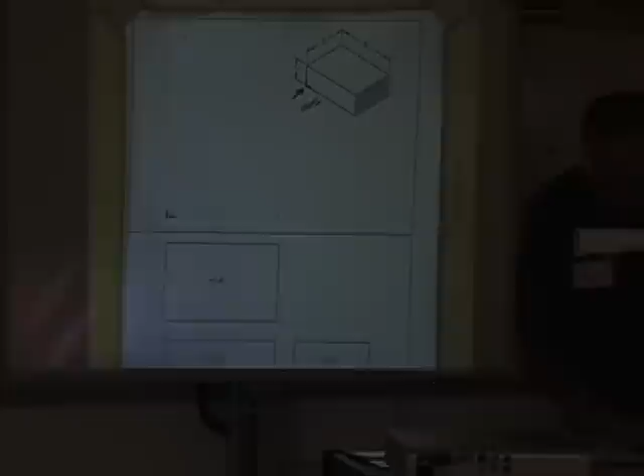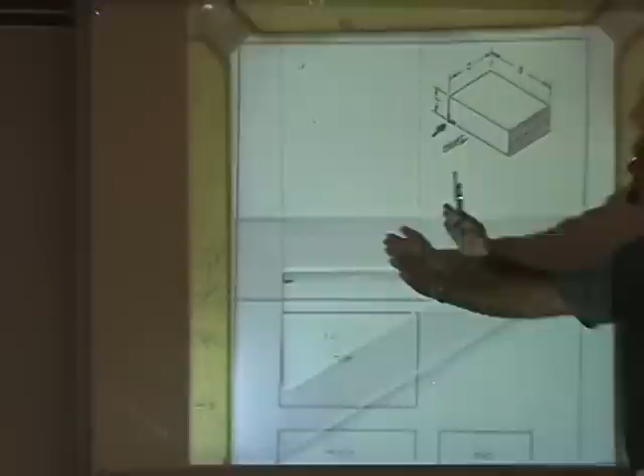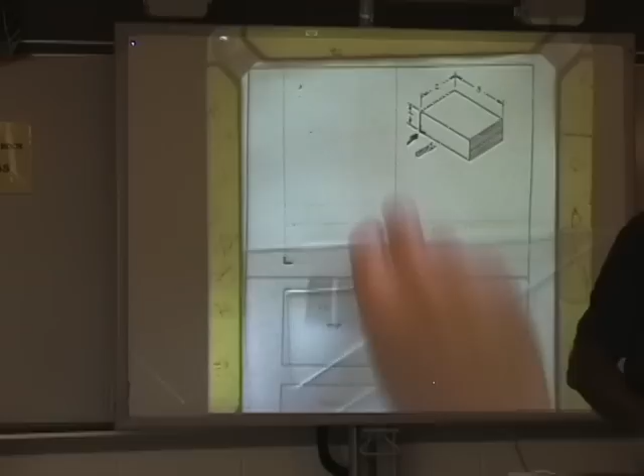So I'm going to take my space for my top view. And then I'm going to give the pen to Ollie. And I'm going to say, if this is the front view, here comes the top. Okay, what I'd like you to do as best you can is draw the top view. We agree? Most part? These are for kids who just can't keep that sketching thing out of, they can kind of keep that addiction to sketching good. And so I'm looking at the top view. We agree it should look like that.

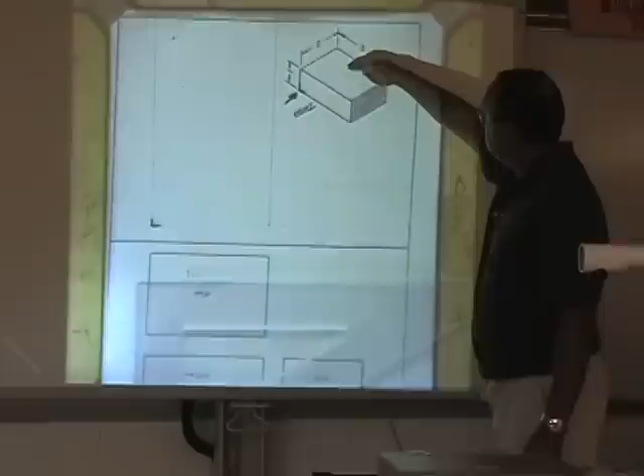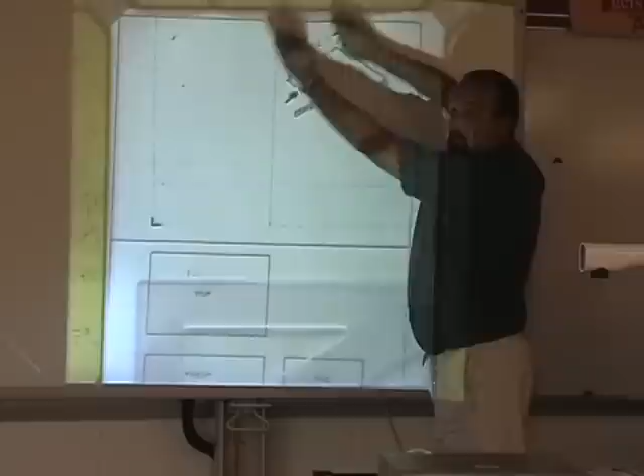Now I have to look at my drawing and see if I'm looking at the top view. Where is that corner right there? That corner for the front view is right here, right? Nothing in here. So where is that corner in the top view? And you may go A, B, C, or D. And if I flip the block up, it would be right there. Because that corner is shared with this corner. So I already have this line in place. I have these two lines in place, right? So all I need to know is where is that line right there? How far is it from here to here? 2 inches.

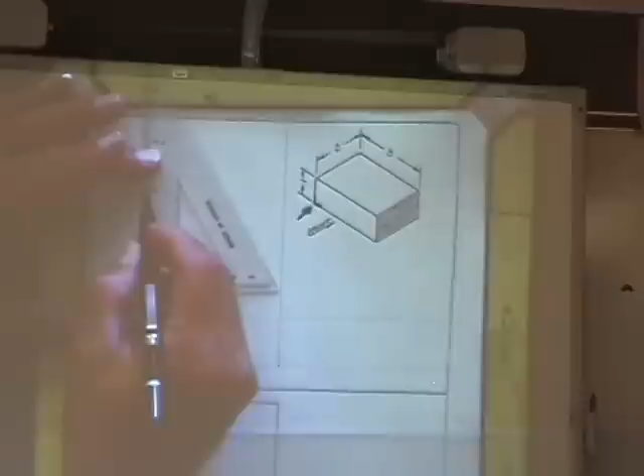So I take my ruler. You're up 2 inches using the construction line. And now I should have a top view. Looking over at the right side, distance between views, I already placed it. What's the distance between views? ½ an inch. Right?

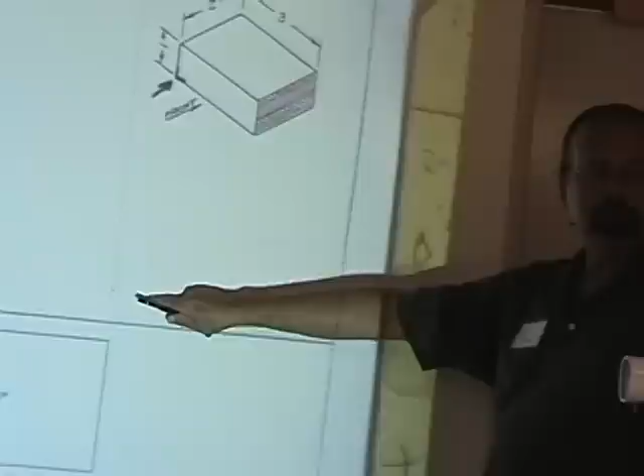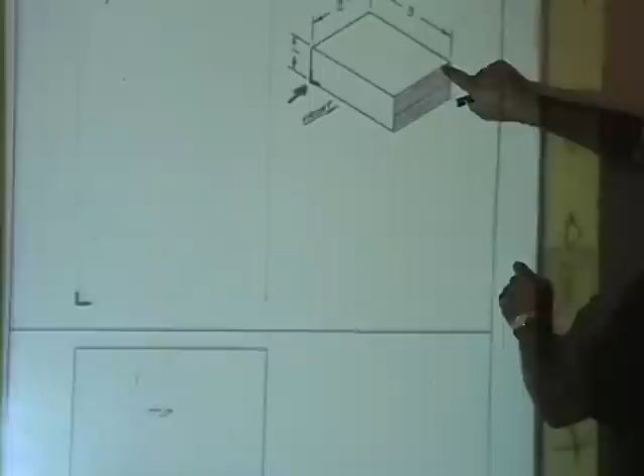And now where is this corner? Make sure that you're looking up here so that you can answer the question. This corner right here on the right side. My lower left hand, lower left hand. This right here goes up. This line's here, coming back. This line's here. I'm missing this line. How far is it from here to here? 2 inches. This is isometric, this is orthographic. So the thing I'm missing now is my visible lines, or object lines.

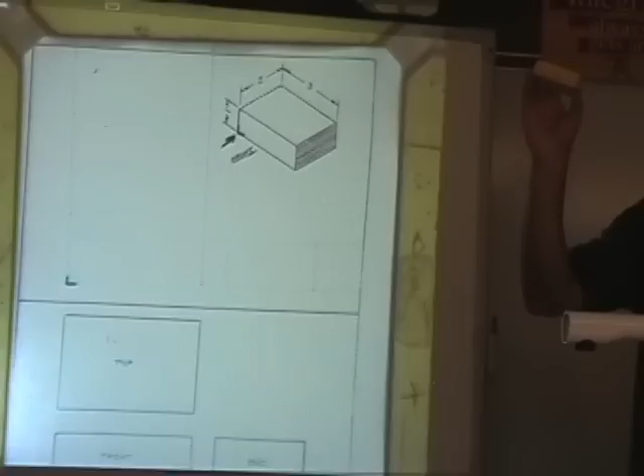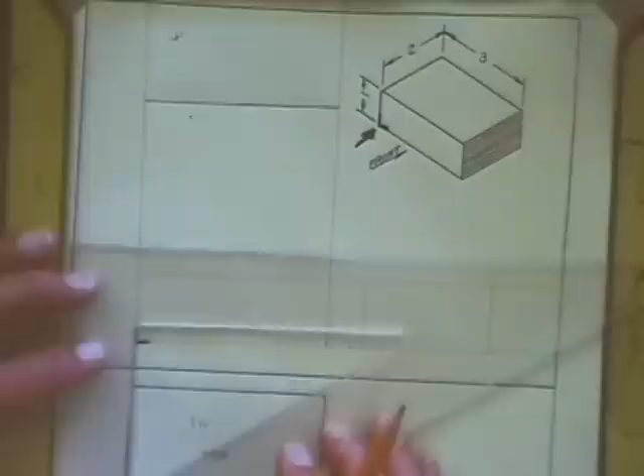Very good. So here's the only trick, is that you want students, again, starting from the top, to darken in exactly, and they draw it one time. They don't color it, but they darken in the object line. And again, making it flow. Notice I use the same skills, starting and stopping, going over one time. I don't go back and forth.

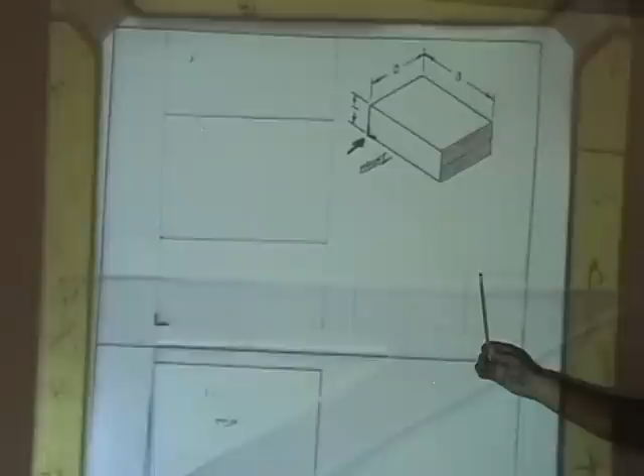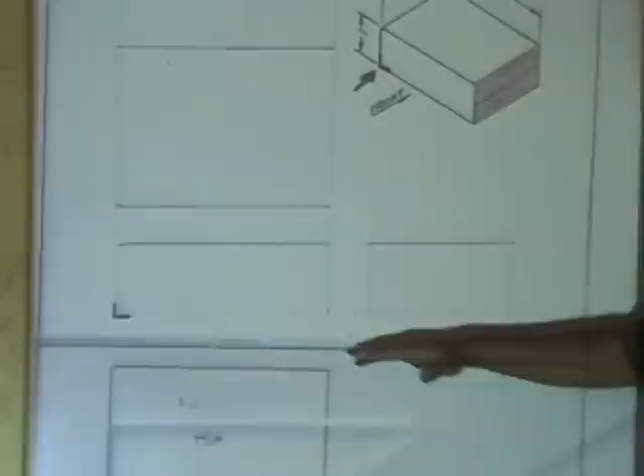When I get to this point, I actually draw 2 lines, correct? I need to draw those lines at the same time. Meaning I don't box in my front view and then come over here, because my object now will start to look a different shape or different size. So if I get a chance to share information on the construction line, then I don't move the triangle, and that way I get a uniform look going across. But if you do it another way, sometimes it'll be a little bit higher or floating on the line and underline, and it'll be obvious in a drawing like this.

Same for the bottom. You notice I've done the horizontal lines first, and then I come back across. And the right side view, because left-handed people will smudge this, but there's my drawing. And again, you might make this an exemplar, put it up on the wall, to check later on, and then have students' exemplars swap in and out.